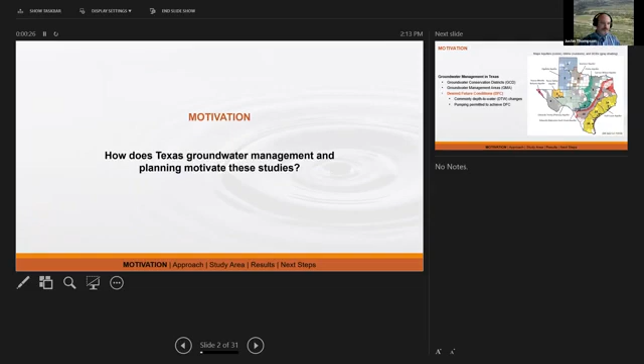Okay, so again, my name is Justin Thompson, and I'm going to talk to you today about groundwater recoverability, specifically about new tools that could be used in managing groundwater sustainability. I'd like to preface and contextualize this talk a little bit by briefly discussing Texas groundwater management and planning and how it motivated these studies. So for that, I'm going to give you an ultra short crash course in Texas groundwater management, or what I'd like to call the alphabet soup of acronyms.

So we start with groundwater conservation districts, or GCDs. These are our primary regulatory entities in Texas, and they're shown here in this map to the right in the gray shading. If you need to drill a well or pump from a well and you need a permit for that, these are the entities that you will apply to.

We have about 99 of them in the state, and they're grouped together into what are called groundwater management areas, or GMAs. These are the numbered areas on the map here to the right. And they're grouped together largely on the basis of the footprints of our major aquifers, which you can see in the colors in the map here.

Okay, so our groundwater conservation districts within a GMA get together to adopt what are known as desired future conditions, or DFCs. Desired future conditions are basically a statement of what do we want our aquifer to look like over a planning period. Now, they take many forms, such as maybe spring flow metrics, but they're most commonly expressed as a depth to water change over time. So depth to water meaning the depth of the potentiometric surface, right, or the water table in an unconfined setting.

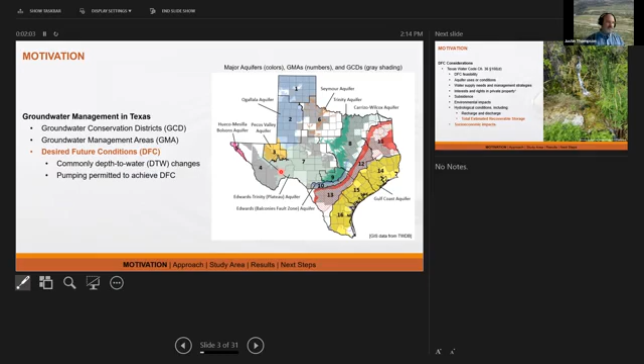So a DFC, for example, might be something like, we want to see our depth to water increase by 25 feet over 50 years, something like that, right? Then, once the DFC is adopted, the districts permit pumping in such a way so as to achieve that desired future condition over the planning period. So given the sort of primacy of importance of these DFCs to groundwater management, let's take a quick closer look at how they come to be.

Well, Texas water law says that when adopting DFCs, our groundwater districts are supposed to think about all of these things you see listed here. It's kind of a wide range of things, some of which are sort of conflicting with one another, right? Everything from the feasibility of achieving the DFC to interests and rights in private property, which is going to be different than folks in California. Groundwater here in Texas is privately owned by the overlying landowner. To say environmental impacts, right? Maybe to spring flows like we've got pictured here.

But the two DFC considerations that I'm most interested in that we're talking about here today are these two at the bottom, right? Total estimated recoverable storage and the socioeconomic impacts reasonably expected to occur with that DFC. Let's look at each of those in a little bit more detail real quick. First, total estimated recoverable storage, or TERS. What is it? Well, it's currently Texas' best estimate of groundwater recoverability.

It's two numbers. It's 25% and 75% of total storage. Total storage meaning we imagine we drain the aquifer completely, how much water would be produced. Now, these TERS reports would seem to indicate that there are potentially billions with a B of acre feet recoverable in Texas. And this has got some people thinking somewhat loudly about what does this mean, right?

They compare, for example, these billions of acre feet that are supposed to be recoverable according to TERS, and they compare that with, say, the latest state water plan that anticipates water deficits under drought of record conditions by 2070 of about 7 million acre feet with an M, right? And this has led these folks to...

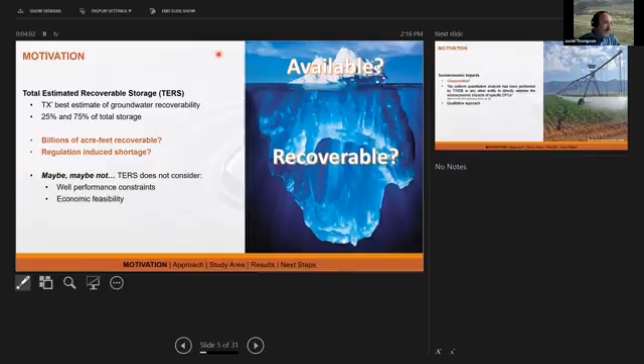If I may interrupt for just a second, we're seeing your speaker screen, not the presentation screen. Okay. Let's see here. How do I fix that? Maybe duplicate your screens or something. Is that right? That's perfect. Perfect. Okay, sorry about that. We'll soldier on. Yeah, no, good. I'm glad you caught it.

All right. So this has got some people thinking, right? Billions of acre feet recoverable according to TERS, and 7 million acre feet deficits under drought of record conditions according to the state water plan. So these people have started wondering loudly, are we experiencing a regulation-induced shortage of groundwater in Texas, right? Is the groundwater that's available under this DFC process just the tip of the iceberg of what could be recoverable?

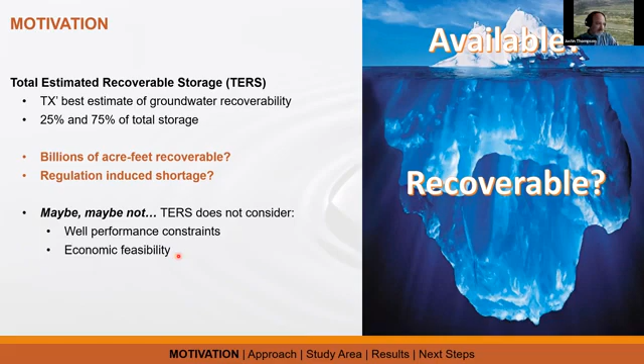Well, maybe not. Among other things, TERS does not consider well performance constraints nor the economic feasibility of pumping that water. So speaking of economics, now I can't advance my slide. There we go. What about that other DFC component that we talked about, the socioeconomic impacts reasonably expected to occur? Well, those are currently totally unquantified in Texas. Why? Well, the districts and the management areas say that no one has come up with a uniform quantitative analysis to address this issue. So they're currently using what they call a qualitative approach to think about this.

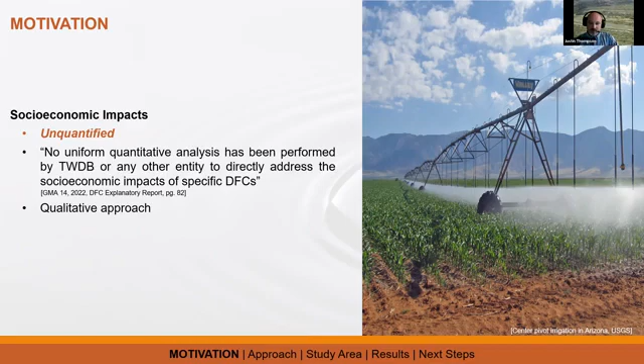So this leaves us with some questions. One, how could recoverability be better quantified, right? How could we perhaps do better than these 25%, 75% arbitrary TERS benchmarks? Two, how do storage conditions drive recoverability? Is that something we need to think about? And three, how might changes in depth to water impact our users? For example, what might those socioeconomic impacts of DFCs be? These are the questions that we'll explore today.

Okay, so first, how could recoverability be better quantified? Well, our approach is in quantifying the hydroeconomic well performance changes with changes in depth to water. Kind of a mouthful, I know. So let's break that down. What do we mean by that? Well, we're really thinking about two things. First, we're thinking about operational impacts. And the question that we're asking ourselves there is, can the well meet pumping demand without failing?

Okay, so let's dive into that a little bit. How would we think about that? Well, what we really want to know is, how does the water level in the well behave under pumping? Right, so you've got two components to that. You've got the depth to water, whatever it might be, and then you've got some pumping drawdown that's going to increase the depth of the water level in the well beyond that initial depth to water.

So we're imagining, okay, well, if depth to water increases, then there must be some depth to water where the water level in the well under that pumping drawdown intersects with the depth of the pump, in which case your pump burns up, or intersects with the depth of the top of the well screen, in which case your well screen starts to foul. So we imagine that capacity to meet your pumping demand without failing is going to decrease as depth to water increases.

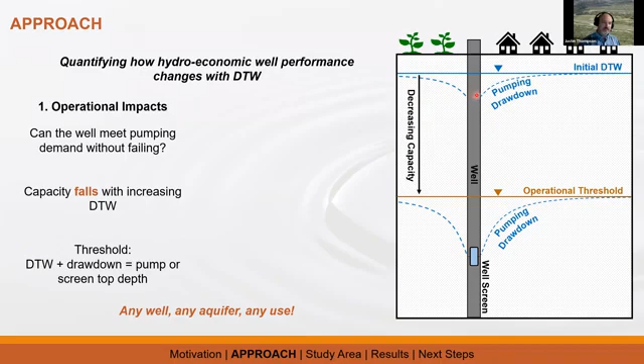At a minimum, there's just less and less potentiometric head available to meet your pumping drawdown demand. And there may actually be an increase in your pumping drawdown as depth to water increases. We'll talk more about that in a second. Okay, so now that we have this operational understanding of how the water level in the well behaves, what about the economics?

The question here we want to ask is, are pumping and perhaps remediation costs affordable? Remediation meaning, well, hey, if I hit one of these operational limits, can I drop the depth of the pump? Can I drill a deeper well? That's going to have costs. So are those pumping and remediation costs affordable?

Well, so here we're imagining that for one reason or another, as depth to water increases, your costs are going to increase. So there may or may not be some depth to water where these pumping costs become equivalent to what the user is willing to pay for the water. In that case, we can imagine that there's an affordability threshold in addition to the operational threshold.

Now, one quick point I want to make is that with the methods that we're using here, we can do this kind of an analysis for any well pumping from any aquifer for any use. And we'll see more about that in just a second.

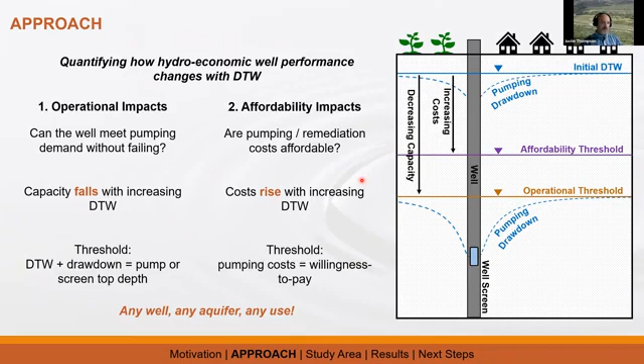Okay, so let's take a quick deeper look here into the operational side of things. We talked about how we're really interested in how the water level in the well behaves. How are we going to quantify that pumping drawdown? Well, there's a number of ways to do that. You could use a specific capacity approach, as Gailey did in his 2019-22 papers, and as we did in our 2020 paper.

Now, if you're not familiar, specific capacity is a term that's usually reported in units like gallons per minute per foot of drawdown. So you could use this to estimate, based on your pumping demand, what that drawdown might be. And it's a really handy term, specific capacity, because it's really easy to calculate understandable results from. And you can do that with just a piece of paper and a pencil.

But specific capacity has some limitations that we're concerned with here. For one thing, specific capacity is generated from the pumping test of a given well under specific storage conditions. If either one of those two things change, for example, the well infrastructure changes, or you want to look at a different well, or the storage conditions in the aquifer change in such a way as to affect pumping drawdown, then you won't be able to use that specific capacity term anymore. You'll need a more advanced drawdown solution, like, for example, the Theis solution, which we have written out here.

The Theis solution improves upon specific capacity because you can use it for pretty much any well. And importantly, it gives us drawdown as a function of time. Specific capacity is just a flat one number. You could think of it as the maximum drawdown over a pumping period. But Theis will give it to us as a function of time. We can calculate drawdown on a per minute of pumping basis, for example.

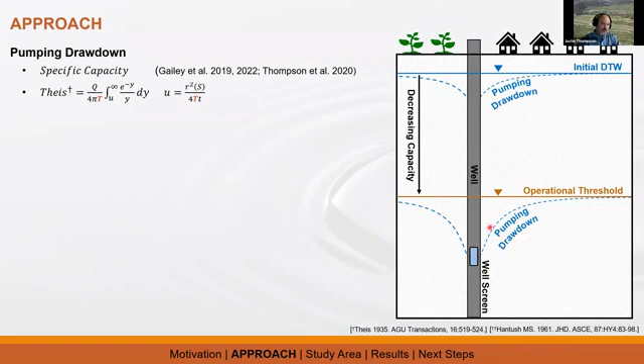Notably, Theis assumes that the full saturated thickness of the aquifer is screened. Now that might be a reasonable assumption in a confined setting, but it almost certainly isn't reasonable in an unconfined setting. And so we want to think about, well, what is the impact of partially penetrating well infrastructure on this drawdown curve? So for that, we need yet another drawdown solution, even more complex. We're going to use, in this case, the Hantush solution.

And again, I've got it written out here, not just to make the mathophiles happy, but I want to point out all of these terms that I have highlighted here, which are either a function of that depth to water or that well infrastructure. Now, the key thing to take away from Hantush is that basically, where all else is held constant, a longer well screen interval is going to result in a shallower pumping drawdown, and a smaller well screen interval will result in a deeper pumping drawdown. And that's kind of the key takeaway there.

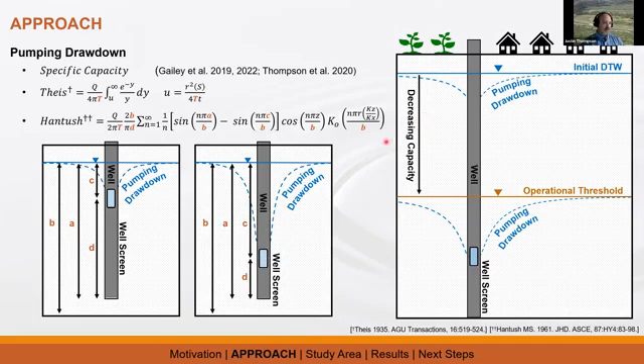Okay, so we've talked about the operational side, right? What about the economic side? How are we thinking about pumping costs? Well, we separate them out into three components. First, we've got lifting costs here, right? And lifting costs is just sort of the energy cost of lifting that water to land surface.

And I've got it written out here because, again, I want to point out some parameters, right? So lifting costs are going to be a function of both your depth to water and your drawdown, S, right? And so what we see in this equation, we're calculating that drawdown on a per minute basis using that Theis solution in part. And then we're converting all of that to power and multiplying that by a price of power, and then distributing that out over the production volume to come up with a sort of dollars per volume basis that we can then compare against that willingness to pay dollars per volume.

Similarly, equipment, that's the cost of your pump itself, right? Which is also going to be a function of depth to water and your drawdown under pumping, which again, we're going to convert to power, right? Multiply by a price of power and then divide out over the production life of the equipment.

Drilling and installation costs are a little bit different. If you want to just say, hey, this is what I paid for my well, you can just plop that in and then we can divide it out over the life and production volume to come up with that dollars per volume. Or you can go with a price approach and tell us what the local prices for drilling, usually on a per foot basis, are in your local area. And then we can multiply that by the depth of drilling, which we'll kind of come back to here in a minute.

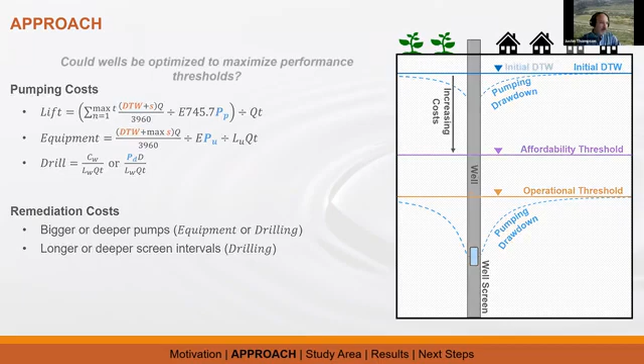We mentioned a minute ago remediation costs, right? If you need to drop the depth of your pump or drill a deeper well, those are going to have costs too, right? Equipment or drilling costs, which we'll use kind of the same approach for. Okay, so that's kind of the operational and the affordability approach.

But then, we just kind of talked about how we recognize that the well infrastructure itself has an impact on the affordability threshold and the operational threshold. So we kind of wondered, well, could wells be optimized to maximize these thresholds? Spoiler alert, we think so.

So the approach we came up with for that on the operational side is sort of straightforward. The idea is to minimize that partially penetrating Hantush drawdown, right, at depth to water, which is a function of depth to water and the screen interval, plus the screen interval itself, which is a little tricky computationally speaking, but we can get it done.

And so the idea here in the simplest example is to say, well, if we increase the well screen interval by a foot, does that reduce the pumping drawdown by more than a foot, thereby resulting in a net increase to the operational threshold depth to water? That's kind of how we envision the operational side of the optimization.

The affordability side is a little bit more complex. There, the idea is to minimize the sum of all of our pumping costs, right? And so, of course, our lifting and equipment costs are both functions of depth to water and that drawdown, which is, of course, itself a function of the well infrastructure. And then the drilling depth, which is, again, a function of the well infrastructure.

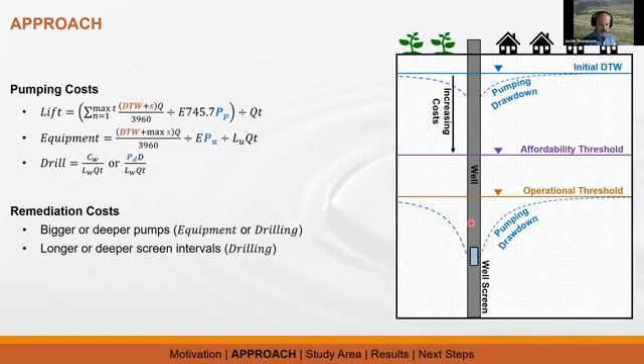So for example, go back here, I showed this very large pumping drawdown with a somewhat smaller well screen. Well, the idea is to say, okay, maybe if we make the well screen longer, the pumping drawdown gets smaller, and the pumping drawdown decreases by more than the screen increase. So that results in a net increase in how deep we can go in this depth to water without the well failing, right? That's the operational side of it.

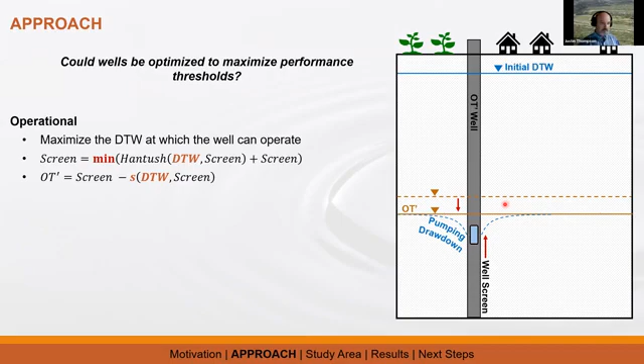The affordability side, the calculation itself is more complex. It requires quite a lot of iteration and Python logic, but the idea is the same, right? It's to say, how can we adjust the well infrastructure in such a way that we can meet our demand without the well failing, but we can minimize the costs in such a way that we can get to this depth to water that is the deepest it can be before we start being in the red and losing money.

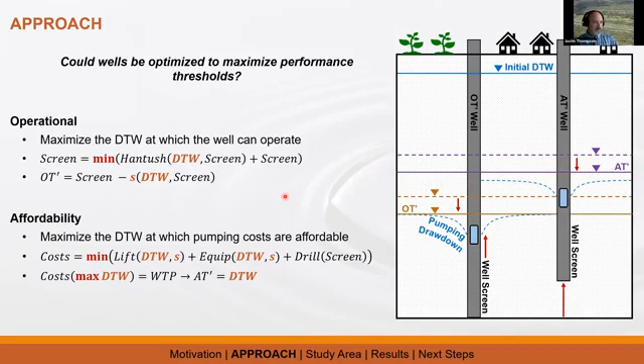Make sense? Makes sense now. Yeah. All right. Rock on.

Okay. So now that we've talked about methods and approaches, we want to see some results. We want to try it out. Let's talk quickly about our study area that we applied these methods to. We looked at the Carrizo-Wilcox Aquifer and specifically the Carrizo-Wilcox within the Post Oak Savannah Groundwater Conservation District. So why Carrizo-Wilcox Aquifer? Well,

first and foremost, perhaps, it stores quite a lot of water, about 5.2 billion acre feet. By storage volume, it is the largest aquifer in the state of Texas, and in fact stores 45% of all major aquifer storage in Texas. 5.2 billion acre feet, as a point of reference, is about 53% of the volume of Lake Superior. And so we've got it mapped out here. You can see the solid reds. That's the outcrop area. The hatching is the subcrop. And then in yellow here is our study area, which we'll talk more about in just a second.

I've got just the quick stratigraphy for you here, where I've highlighted the water-bearing formations in blue. You can see the Sparta sand and Queen City sand, which are minor aquifers in Texas. And then the Carrizo-Wilcox itself is composed of 4 formations: the Carrizo Sand, Calvert Bluff, Simsboro, and Hooper formations. We actually looked at all 4 of these formations in the central area, but for the sake of time today, I'm just going to show you results for the Simsboro, which is one of the more productive and heavily exploited formations of the Carrizo.

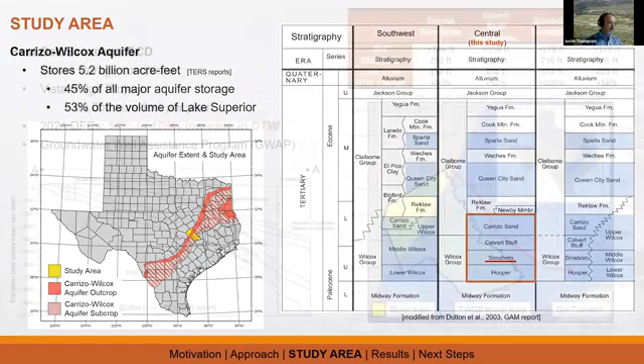Okay, so why Carrizo? Check mark. What about why Post Oak Savannah Groundwater Conservation District? Well, for one thing, it gives us a nice set of varied storage conditions, right? Recalling question 2, how do storage conditions drive recoverability? Well, here along the northwest terminator, we've got shallow and unconfined settings, and then down toward the southeast of the district, we've got very deep and confined settings. So we've got a nice range of storage conditions to look at here.

Number 2, the Vista Ridge Pipeline Project, which pumps from a well field right about here, supplies water to the city of San Antonio, about 100 miles away. And it pumps about 50,000 acre feet per year, came online in, I think, late 2019, and pumps more water from the district than every other user in the district combined.

Perhaps in part in light of the Vista Ridge Pipeline Project, the very recently released 2021 desired future conditions for this district reflect a 50 to over 100% increase in depth to water for the Carrizo-Wilcox. And that's what we've got pictured up here. So for example, for the Simsboro formation the desired future condition is to increase depth to water by 278 feet. So from 2010, the average depth to water was 256 feet. That's going to go up at the end of the planning period to 534 feet, to basically more than double in depth.

Just a quick note I want to make here: this blue shading here is the Texas Water Development Board's groundwater availability model footprint that we were talking about before the talk got going. And we're going to use that model to characterize the aquifer in this study as well.

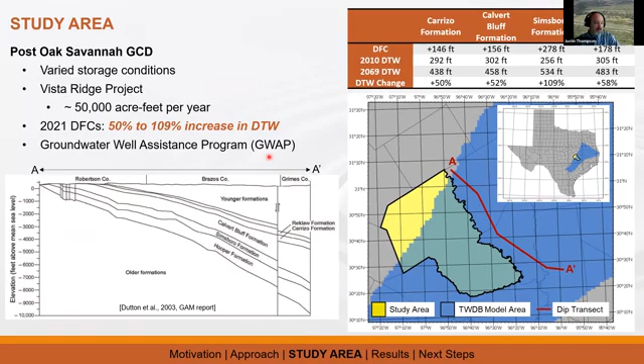The last reason we looked at Post Oak Savannah is they actually have what's called the Groundwater Well Assistance Program, or GWAP, which we thought was kind of interesting. There's sort of a recognition that these desired future conditions are fairly impactful. So this program says that if your well experiences a failure, then you can apply to this program for financial offsets for that failure. Okay, so that's our study area.

Now let's get into actual real results, and we're going to address first that question 2, how do storage conditions drive recoverability? For this, we're going to take kind of a TERS approach. We want to deliberately compare and contrast a little bit with that TERS number. So what we're going to look at is recoverable storage yields. And for that, we're looking at a pretty simple yield calculation.

It's your surface area multiplied by either that operational threshold or that affordability threshold minus what the depth to water was before, multiplied by a storage coefficient, right? So it's the same thing as that total storage, only now we're not imagining draining the aquifer completely. We're just imagining draining it to either of these thresholds to see how much water would be produced. And those storage coefficients are going to be important, right? We'll talk about why in just a second.

Sort of recognizing what we were talking about a minute ago with that optimized well infrastructure, we said, well, we want to think about how much could really be recoverable. Then let's look at model optimized well infrastructure. So that's what we're doing here. We're imagining that there's a model optimized well pumping from each model cell, which is a 1 square mile resolution. I already mentioned that we're taking our aquifer characteristics from the board's model.

And for this example, we went with an agricultural kind of setting. So we're looking at a pumping rate of 70 gallons per minute, willingness to pay of $100 per acre foot, price of power 10 cents per kilowatt hour, and a well efficiency of 75%. So here, this is our study area, right? This Post Oak Savannah Groundwater Conservation District. It's actually 2 counties, Milam County and Burleson County.

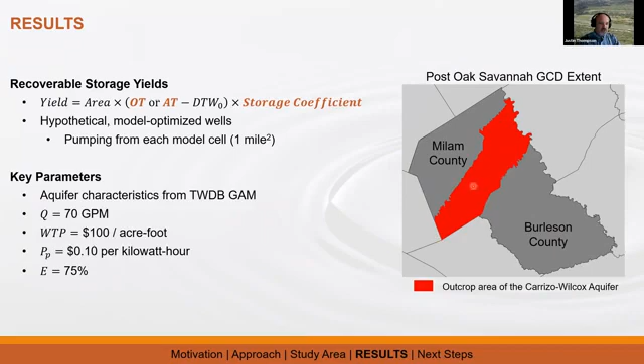And this red here is a loose, honestly, not very good in some senses, representation of where the aquifer is in outcrop conditions. So don't memorize it, but just keep this shape and its location in your mind for a second. Okay, so now the good stuff. All right, so what are you looking at here? So this is operational yields, right?

So this is how much water could be produced if you drained the aquifer to that operational threshold for each one of these model grid cells. You can see it ranges quite a bit, from about 0.4 of an acre foot to over 56,000 acre feet. We've got some white cells here along the northwest terminator where, even at this initial depth to water, pumping is not possible, right? You can't pump without burning up your pump, for example.

And so here we see, at least in this analysis with these parameters, about 73% of the total aquifer storage is recoverable. Not bad. It's actually not that far off from that 75% TERS benchmark, right? But what about the affordable yields? Ooh, okay, well, those are quite a bit different, right? So first and foremost, I told you to keep in mind the shape of that red blob, right? Oh, looky there. It's right along the same area where we're seeing our high economically affordable yields, right?

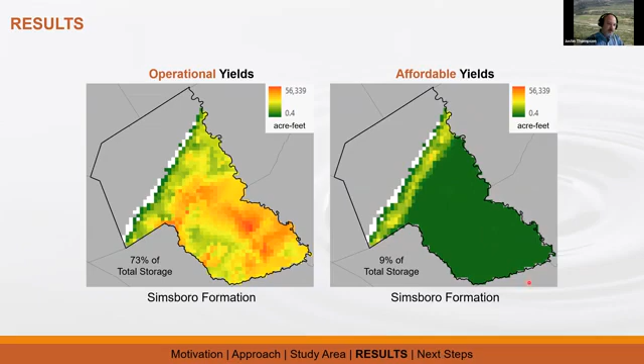So what is this showing you? Okay, so we've still got those white cells where it's not operationally possible to pump. And then we've got this band of higher yields and then a whole big area down here of relatively low yields, right? So, well, what's going on? Well, I told you that those storage coefficients would be important, right? What you're seeing here in these hotter colors is where the affordability threshold, that depth to water, is falling somewhere within the saturated thickness of the aquifer.

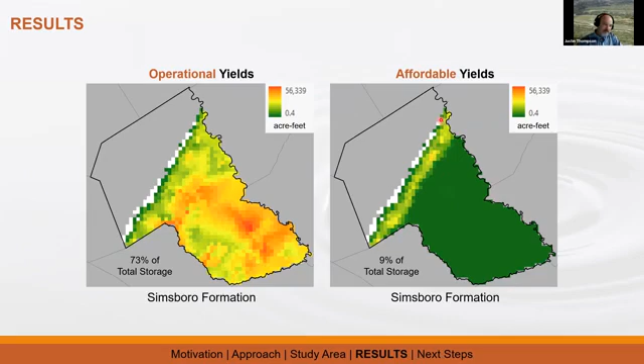So in that case, the yield storage coefficient is going to be a specific yield, which in this case for this aquifer is 0.15. Whereas down here, the affordability threshold depth to water is falling somewhere in the pressure head of the aquifer. So all of the water that's being produced in the yield calculations down here is coming from a storativity storage coefficient, which in this case is 0.0003. Right, so orders of magnitude smaller than that specific yield. And so that's why, even though there is some variability down here, in this scale, it pales in comparison to these hotter colors up here.

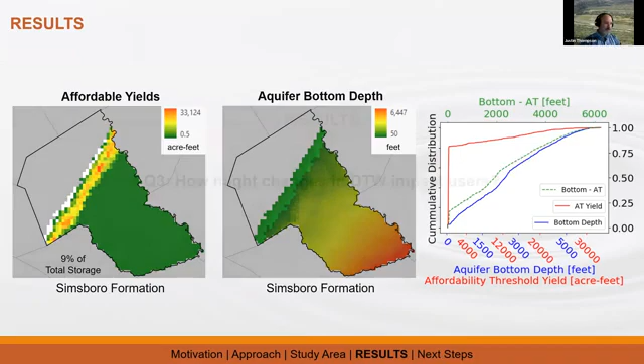Okay, so if we understand a little bit about how storage conditions drive recoverability, now we want to look at that third question, right? How might changes in depth to water impact our users? So let's start by looking at the same yield optimized infrastructure we looked at before. And here we're not looking at yields, we're looking at the depths of those affordability and operational thresholds. So here's the operational threshold at the initial 2010 depth to water. That's the calibrated depth to water from the board's model that the local desired future conditions are measured from. All right, so again, you see quite a range here, right? 3 feet to as much as over 6,000 feet.

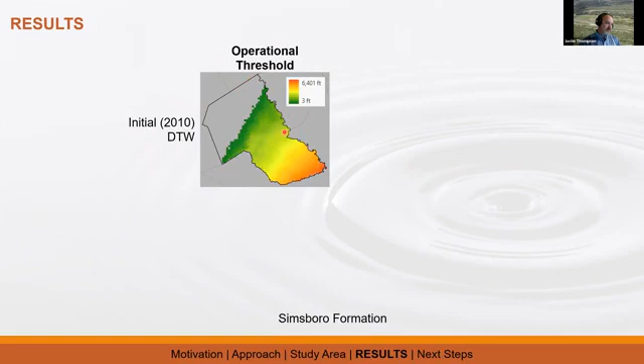So now we want to know, how does this operational threshold depth change if we increase the depth to water in the district according to that desired future condition? We add 278 feet of depth. Well, really what happens is we get a new band of white cells. So you'll notice here, there were no white cells here. We cut away everything that couldn't pump at the 2010 depth to water. Now we've got a new band of white cells. All of these cells are places that, at the given model parameters, it was feasible to pump at the 2010 depth to water, but now at the DFC depth to water, you're out of luck. Your well has failed.

On the affordability side of things, right? So this is what we're looking at in terms of the depth of that affordability threshold at the 2010 depth to water. And this is kind of the corollary for what you just saw in the yields, right? You can see these great depth affordability thresholds that are falling down within the saturated thickness of the aquifer and giving us those hot yields we saw a second ago.

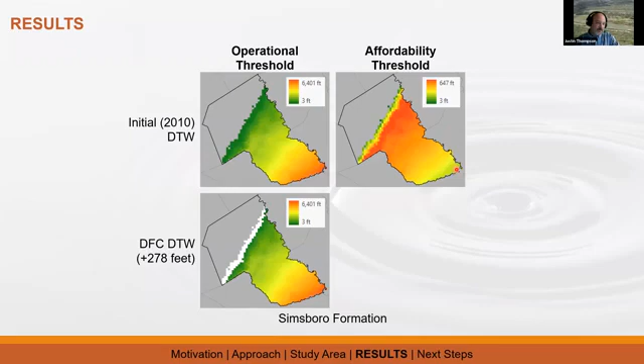And then way down here, it's only 3 feet. Interestingly, even at these great depths of this aquifer bottom, over almost 6,500 feet, it was actually still economically feasible at these model parameters to pump, even from way down there. The affordability threshold depth may have only been 3 feet from where it was at 2010, but it was feasible.

Now at the DFC depth to water, right, we've got the same band of white cells. It's physically infeasible to pump from. And now we've got a whole bunch of black cells that were economically feasible or affordable at 2010 and now aren't. And what I think is interesting about this result is it's not just this uniform band of black, right, that occurs when it starts to get really deep, but you've got these little pockets of black elsewhere, indicating that there is more than one sort of function to this. So for example, you might have a very low hydraulic conductivity value here.

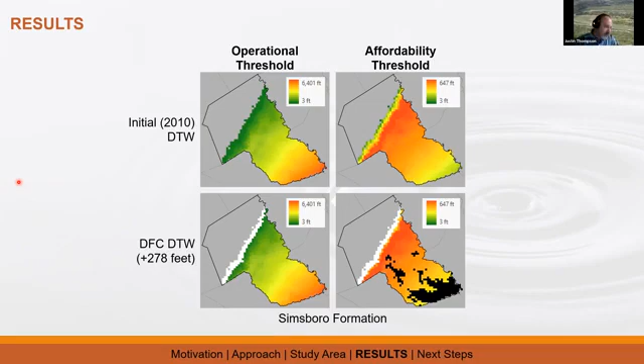Okay, so that's an analysis of how this depth to water change would affect our users for hypothetical model optimized wells. What about existing wells? Well, for that, we looked at our submitted drillers report database, and we found that there were 451 wells within the district pumping from the Carrizo-Wilcox aquifer. 84% of those are domestic wells, 11% livestock, and 5% irrigation. And these are the only 3 types that we looked at.

And so what we did is we used those methods that we looked at above, and we calculated how pumping costs stack up for all of these wells within the district. And that's what we've got pictured here. We've got them separated by color. The yellow stuff, that's our domestic users. The green stuff is our irrigation users. And the blue stuff is our livestock users. We've also separated out by those cost components. So the light colors for each one are the drilling costs, medium colors are the pump equipment, and the darkest colors is that lifting energy.

And so one thing that I think is interesting here, we already see that there is a difference in how these costs are distributed based on use type, right? So our domestic users are 84% of our tested wells, but they're only bearing 75% of these aggregate costs. By comparison, our irrigation users, only 5% of tested wells, are bearing 11% of these costs. Why? Well, for one thing, our irrigation and to a lesser extent our livestock users simply pump more water than our domestic users do. But they also tend to have slightly deeper wells.

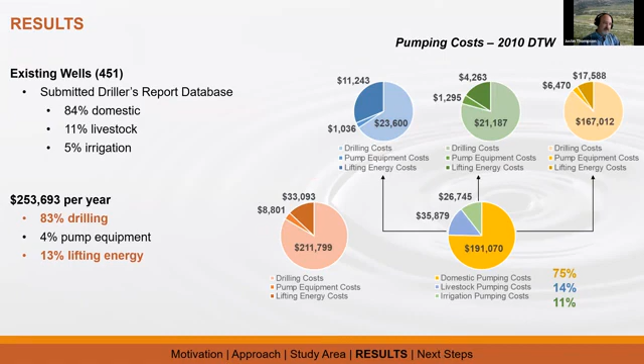I personally find that very interesting for a number of reasons, but one potentially interesting reason is that we found that only 25% of this change in costs were eligible for that groundwater well assistance program I told you about. Why only 25%? Well, in part because our irrigation users are exempt from the program, but more than that, the groundwater well assistance program only compensates for drilling costs. It does not compensate at all for lifting energy costs. So we think it's probably fair to say that this policy intervention is actually misaligned with the most important impacts of this management decision in terms of depth to water.

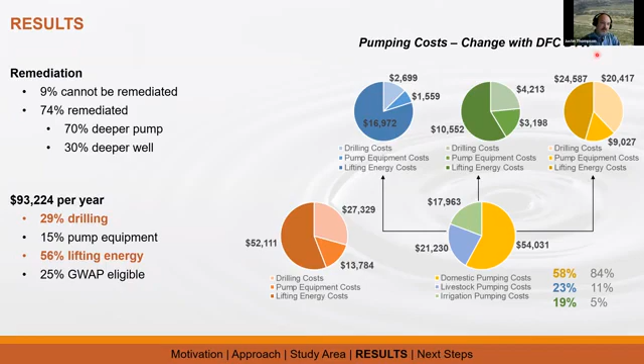Okay, so we took it a little bit of a step further. We said, okay, well, we recognize that most of our wells tested here are domestic wells. And we're talking a lot about affordability, which we can calculate like we did above from what you're willing to pay for the water. But also for domestic wells, EPA gives us a metric for affordability, right? 2.5% of median household income. So what we did was we looked at how this change in cost impacted these wells by distributing those costs onto median household income by census tract. And what we found there was rather interesting.

We found, first of all, that this change in depth to water under the desired future condition left 99% of our domestic wells affordable by this simple...

Sorry, my headset goes dead when it doesn't hear anything for too long.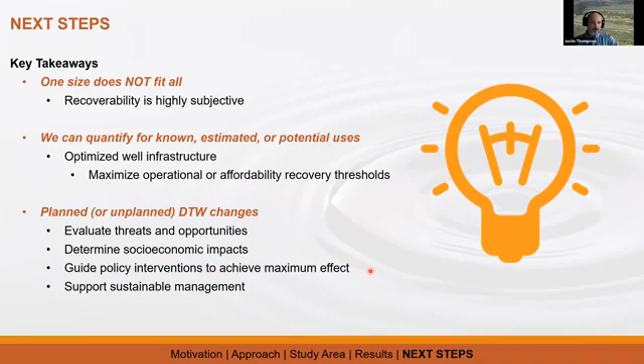We can do that for existing infrastructure, or we can do that for model optimized well infrastructure. We can do that at either operational or affordability recovery thresholds. This gives us the ability to look at how planned or even unplanned, as might be caused by, say, drought, depth to water changes would impact recoverability. We can evaluate threats and opportunities, determine socioeconomic impacts, guide policy interventions to achieve maximum effect, like that GWAP program I mentioned, or even support sustainable management.

Now, this current version of the model, it's not necessarily conclusive, right? There's all kinds of things you could do with it. You could implement more tailored drawdown solutions if you wanted to consider things like delayed gravity response, leaky confined systems, or even intersecting drawdown, if that's something you're interested in. We didn't talk about water quality at all, so you could perhaps integrate potable water depth limits to help address water quality as a limit to recoverability.

You could also tweak the model for your localized parameterization. So for example, do you know more about what your user's pumping rate is or their pump power? There's subtle differences there in how the model would approach some of these calculations. And then finally, we have an interest in operationalizing this. We don't want to just leave it on the bookshelves and the ivory towers of academia. We want people to be able to use these tools.

And so for that, here at the Bureau of Economic Geology, we're actually working right now on developing a web-based user platform that would be as user-friendly and easy to use as possible for anybody from ma and pa with a well on their property all the way up to groundwater districts and management areas. You could enter parameters manually, or you could uplink certain data sets to the model.

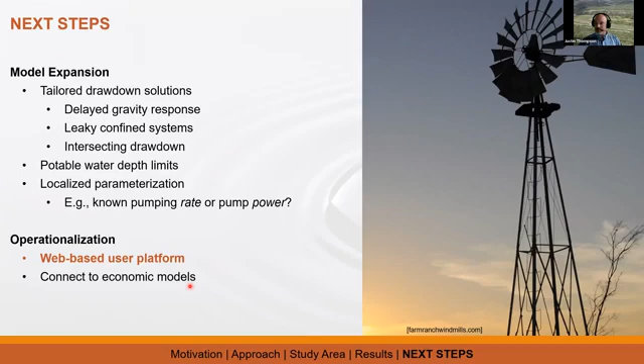And then finally, you could connect these results to other economic models. We talk about the socioeconomic impacts of desired future conditions or other depth to water changes. And what we modeled here was changes in pumping costs, what I like to call direct socioeconomic impacts. But we recognize, of course, that if you're using a well to, say, irrigate crops or water livestock and your well fails and it can't be remediated and you can't water your livestock or irrigate your crops anymore, that's going to have additional socioeconomic impacts that aren't considered here. What you could do is you could use these tools or something like them as sort of a trigger point for when to deploy other economic models that look at those impacts specifically.

And then finally, I want to talk briefly about the California connection. I figured there's a lot of folks in this audience that know a lot more about this than I do, so I didn't want to belabor it. But to me, when I read about the Sustainable Groundwater Management Act, I understand you have these groundwater sustainability plans. And when I read about your measurable objectives, which seem very similar to desired future conditions to me, and your minimum thresholds, that strikes me as depth to water-based management. So you could use the same tools that we've talked about here for desired future conditions to look at these measurable objectives and minimum thresholds.

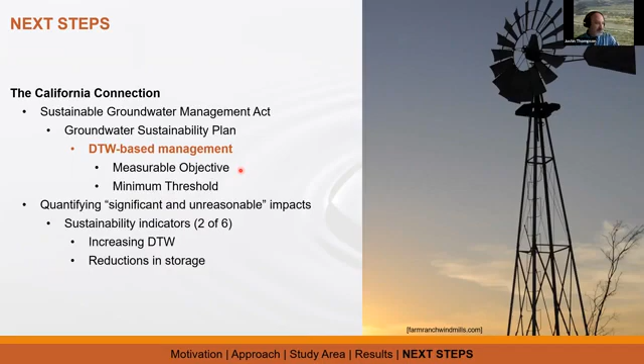You could do that to quantify, well, what exactly is a significant and unreasonable impact for at least 2 of your 6 sustainability indicators, increasing depth to water and reductions in storage. Is an increase in pumping costs of 50% unreasonable, 100% unreasonable? So that's kind of my thinking there, and I'd love to talk with you all more about that in our discussion time.

Again, running short on time, so I want to do my acknowledgments. My co-authors, Michael Young and Charlie Kreitler, the Jackson School of Geosciences at the University of Texas at Austin, the Bureau of Economic Geology, which for those of you who aren't familiar, is a unit of the University of Texas, but is actually the state's geological survey. The State of Texas Advanced Resource Recovery Program, Planet Texas 2050, the BEG Excellence Fund for Water Research and Policy, and the Texas Water Resources Institute.